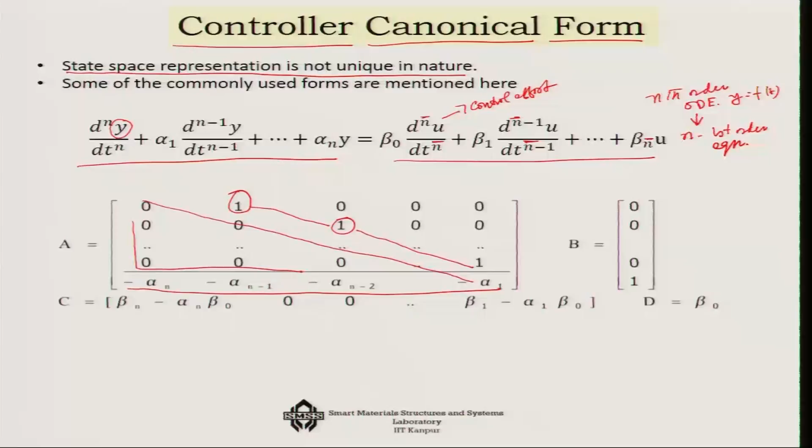That is the way it is arranged, and all other terms are 0 here, and below also all other terms are 0 except the last row. So, this block is 0 and this block is 0, and in the last row we get these coefficients back from the characteristic equation, which are minus alpha n, then minus alpha n minus 1, and so on up to minus alpha 1 coming as the last term.

That is the way we can represent the A matrix, and then the B matrix, that is the actuator influence part. Remember again that we are talking about the form x dot equals A x plus B u. So, in this B matrix, all the entries will remain 0 except the last, which will be unity. That will be our B matrix, and I earlier told you that we can develop an output matrix, which is y equals C x.

Sometimes it is extended up to y equals C x plus D u if the control effort directly affects some of the outputs. So, in this case for the controller canonical form, the C matrix will have the following form, taking coefficients from the two sides, and the D matrix is simply beta 0.

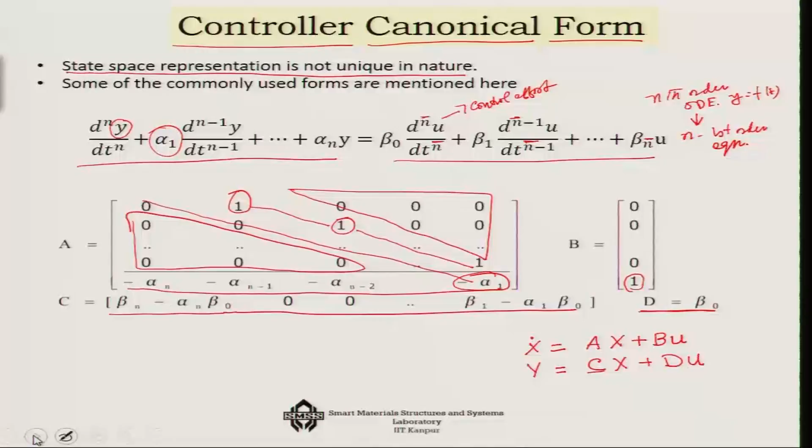So, if we develop this nth order ODE by decomposing it first into n first order equations, and then writing it in this ABCD form, then we are going to get the controller canonical form of the system. This form will be useful for us, that is why we have to always keep this form in our mind.

There is another one which is known as the observer canonical form. This is just the dual of the controller canonical form, and you can easily see why it is the dual if you look at the structure of the A matrix here. Instead of the last row, now it is the first column where all these coefficients are appearing, starting from minus alpha 1 to minus alpha n.

And once again the super diagonal terms are unity here and no other terms are coming into the picture. The B matrix is not 0 0 1 now. The B matrix has all these terms based on the coefficients drawn from the governing equation. The C matrix is 1 0 0 0, and the C matrix corresponds to the output equation y equals C x plus D u, where y is the output.

That is why we put more focus on this, because this is related to the sensing. So, this is the sensing, like B is the actuation, this is the sensing influence matrix, and of course, D is the disturbance.

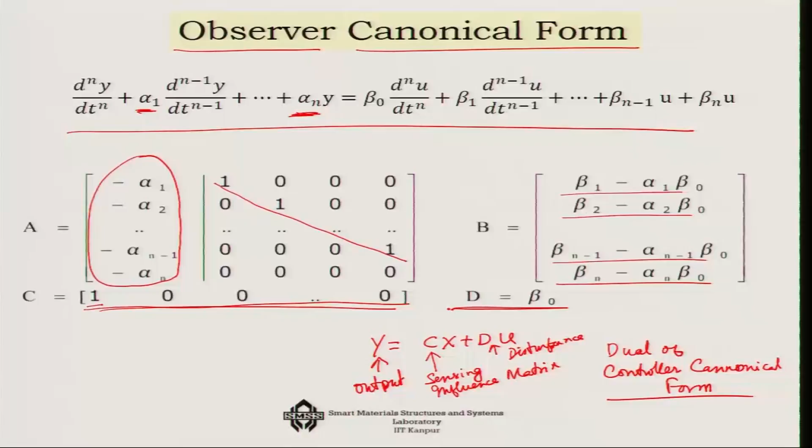There is one more form, known as the Jordan canonical form, and this is the form for non-repeated eigenvalues. Once again we have the same equation in front of us, and you can carry out the Laplace transformation of the entire equation. So, y will be Y(s), u will be U(s), and you can write each one of them through partial fractions, so that you separate it out in terms of lambda n distinct roots. That is what then becomes our characteristic equation.

So, now if I line up all these eigenvalues, which are the distinct roots, along the diagonal, and the rest is all 0, then that is my A matrix in the Jordan canonical form. The B matrix is all unity, the C matrix has all the residuals corresponding to each one of these roots, and D is beta 0. So, this is the Jordan canonical form.

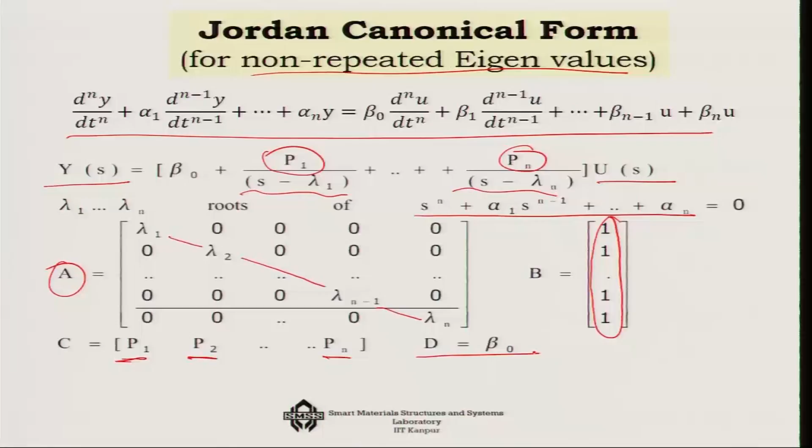These 3 canonical forms are important for controller design, that is why we have first introduced these 3 forms to you. Now, going from form to form, it is like the same person whom you are putting into different dresses, dresses corresponding to your convenience, but the person remains the same. How do I prove that? You can prove it from the proof of invariance of the eigenvalues.

If you look at it, our initial governing equation was x dot equals A x plus B u. Now, let us say that I do not want it in this form, I want it in controller canonical form or observer canonical form, some or the other form. So, let us say corresponding to that form, the state vectors are not x but z. First of all, we are working in the linear domain. So, let us assume that this mapping from x to z is possible through the transformation matrix T. So, T is our transformation matrix.

So, then this entire form will look like T. So, I am now writing x equals to T z. So, this will become T z dot, that is this term, then A x will become A T z and B u will remain as it is. That is what is my second stage.

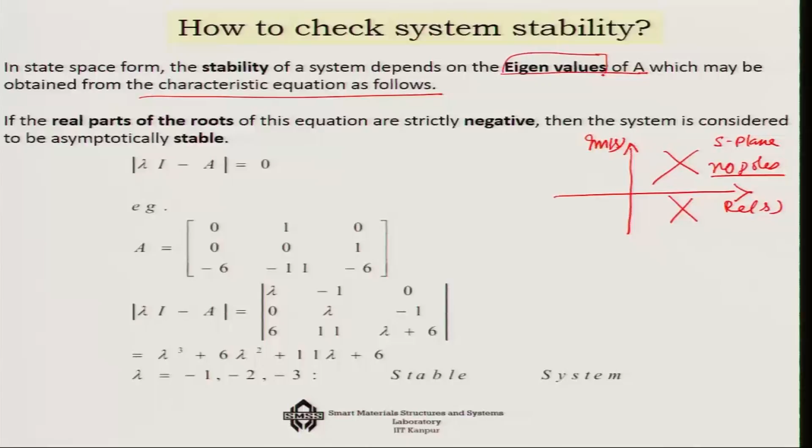That means, if I plot the S plane, the real part of S versus the imaginary part of S, I said that no poles can be placed in the right hand side, because then it will be unstable. Now, in this state space form, the pole is to be replaced by the eigenvalues, otherwise it remains the same. That means, if the real parts of the eigenvalues are strictly negative, then the system will be considered to be asymptotically stable.

Let us consider a kind of a system, like say this is a system. If you look at it, this system looks as if it is in control canonical form, but we cannot guarantee it because we have not seen the B yet. Only when we see the B also, then only we can say yes, it is in control canonical form.

Now, anyway, our job here is to find out what are the roots, what are the eigenvalues of this system. Well, we can find out what is the determinant of this system, that is lambda I minus A. Keep in mind that lambda I actually means I is an identity matrix. So, it is lambda 0 0, 0 lambda 0, 0 0 lambda. So, I can put that as lambda I minus whatever is my A matrix.

If I do that, I am getting this lambda I minus A, and if I find out the determinant, I am going to get this polynomial, which is a cubic polynomial of lambda. Now, by using MATLAB or other formulations, or Newton-Raphson's, you can find out what is lambda, and you will see that these are the three roots of lambda, and that means this is a stable system, because the lambdas are all in the left half plane. So, minus 1, minus 2 and minus 3. So, this is going to be a stable system. That is the way we can first of all check the stability of a system.

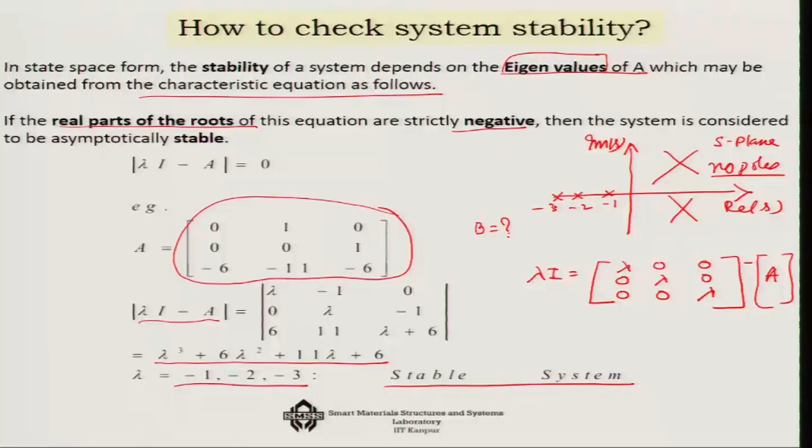Next, what we can check is the so-called control canonical form of the system. Next, we want to talk about the controllability and the observability of the system, particularly the controllability, and observability we will check side by side with respect to the observer canonical form. Now, let us look into these forms. So, how do we define the controllability of a system?

The term itself is telling us that if we have a system where I have some actuators through which I am trying to control the vibration, this actuator should be placed in such a manner that it can control the vibration. For example, let me give you the physical significance. Suppose this is a cantilever beam and this beam is vibrating. If you want to control this vibration, you have to place actuators. If you place an actuator here, you will be able to control. If you place it somewhere here, the effort will be increasing, but still you will be able to control.

Now, a particular state x1 of a system is called controllable if all initial conditions x0 at any previous time t0 can be transferred to a future x1 in a finite time by some control function u(t, x0), and this also has to be a finite control effort.

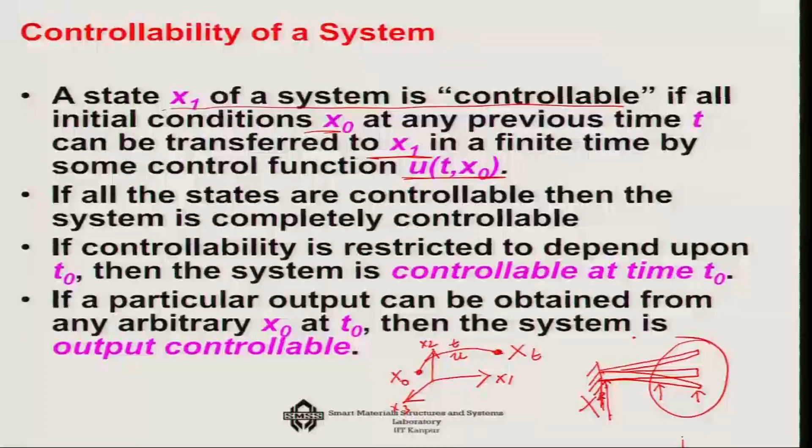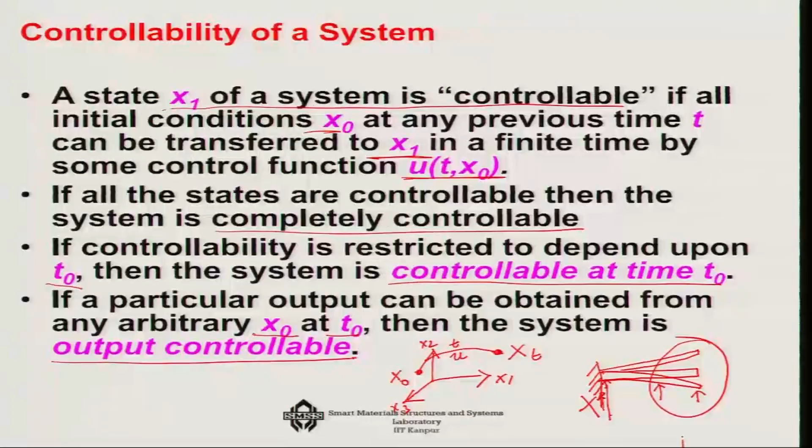And this is simply not possible in the case I discussed: if you place your actuator here, you will not be able to control the vibration of this system. So, if all these states are controllable, then the system is completely controllable. If controllability is restricted to depend upon t0, then it is called controllable at time t0, that is within this time it is controllable. If a particular output can be obtained from any arbitrary x0 at t0, then the system is called output controllable. So, these are some subdivisions of controllability, and that is the definition of controllability.

How do I test the controllability of a system? Well, that is simple. If you have A and B from the state space representation x dot equals Ax plus Bu, you can develop your controllability matrix from A, B with this particular formation: B, AB, A squared B, up to A to the n minus 1 B, where A is of size n by n, and the system is fully controllable if and only if the rank of C equals the number of states.

We will then say yes, this system is full state controllable from t equals t0 to any time t, such that you will get a continuous input u(t), and it will be able to drive it from x(t0) to x(tf) within a finite time interval and with a finite energy. So, by checking this particular condition, if this is satisfied, we can say yes, it is controllable.

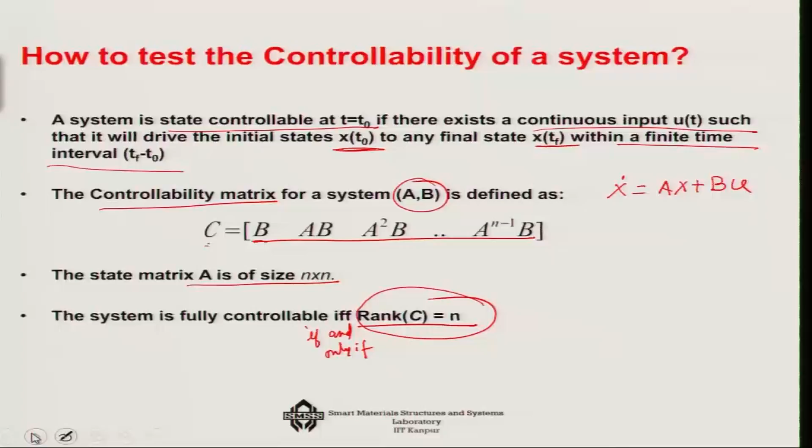Before designing any controller in state space control, this controllability must always be checked. So, that is the first condition. If you get it checked, then the inverse of the transformation will actually exist. Now, in some cases, controllability is considered to be a very strong constraint for a multi-degree of freedom system. So, there is a weaker definition of controllability, we call it stabilizability.

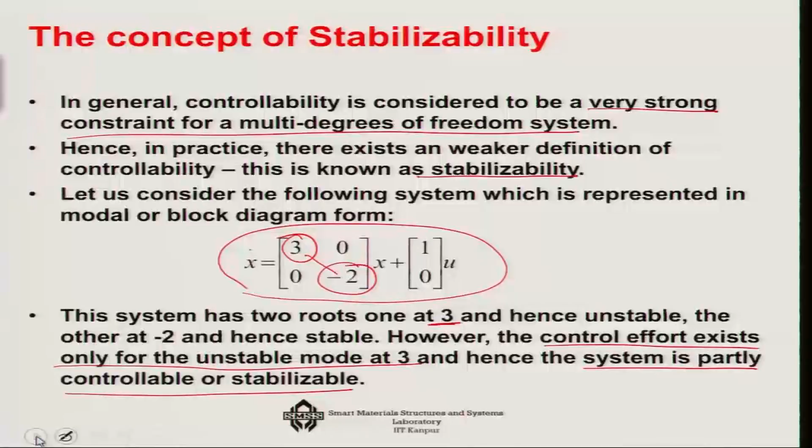For example, if you look at this particular system x dot equals Ax plus Bu, where A is 3 0 0 minus 2 and B is 1 0. The system has two roots, clearly it is only block diagonal, one at 3 and another at minus 2. This root is unstable. However, this root is stable. So, the control effort exists only for the unstable mode at 3, and hence the system is partly controllable or stabilizable. So, this is partial controllability or stabilizability as a special subset.

Now, I told you that the observer canonical form gives us the dual problem, that is from the sensing perspective, a particular state x1(t) at some given time is observable if the knowledge of u(t) and output y(t) over a finite segment of time can completely determine the states x1(t). For controllability, we needed the A B pair, and for observability we need the A C pair.

And this is defined as O transpose equals C, CA, up to CA to the n minus 1. The state matrix is considered of size n by n, and only if the rank of O equals n is the system fully observable. So, controllability and observability are two dual forms.

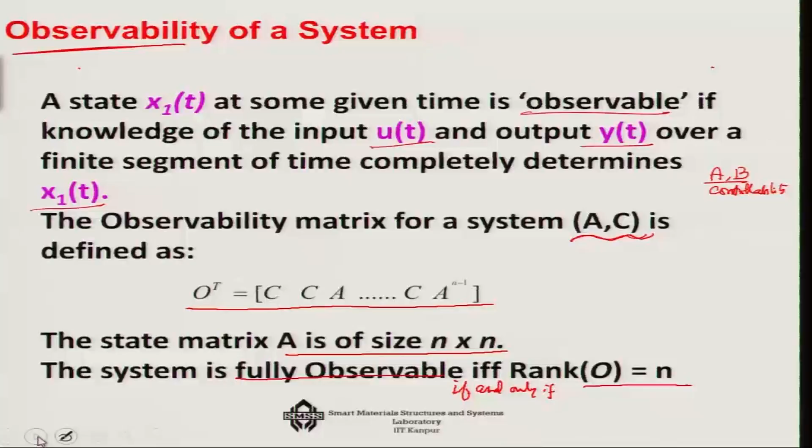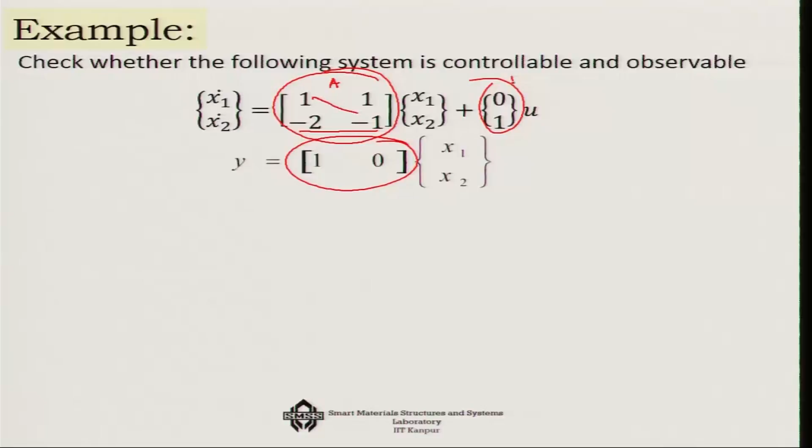Now, let us say I give you a very simple example, where we have x dot equals Ax plus Bu, where this is the A matrix 2 by 2, this is B and this is C. By looking at it, we can say that it may be in a control canonical form, because we have the coefficients only at the last row, and the super diagonal is unity, rest terms are not there. So, anyway, we can first find out the controllability, and then the observability.

So, this controllability is what? It is B and then AB. So, for us what is B? B is 0 1, and what is AB? A times B, first row first column gives 1 into 0 plus 1 into 1, so that is 1, and then second row, minus 2 into 0 plus minus 1 into 1, that will be minus 1. So, that is my B AB.

We do not have to consider additional terms, because A is of 2 by 2 size. So, A to the n minus 1 B means A to the 2 minus 1 B, that means AB. So, we go only up to B AB, and we get the controllability matrix. Let us call it C with a special pattern, so that we do not confuse it with this C. Similarly I can find observability, again with a special pattern, which is C, CA, up to CA to the n minus 1. So, we get the observability matrix.

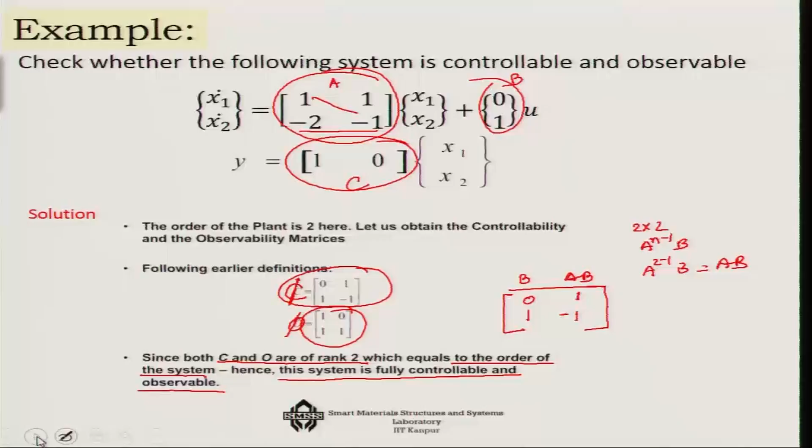Now, if you check, for both C and O the rank is 2, which equals the order of the system, hence this system is both fully controllable and observable. So, that is just an example to keep us tuned with controllability and observability.

Thank you. In the next lecture, we will talk about how to apply all these concepts together for full state feedback control.